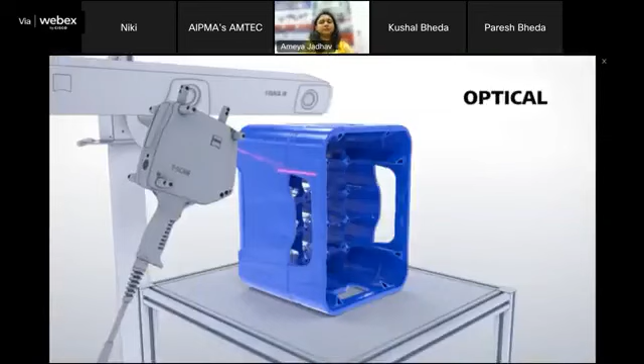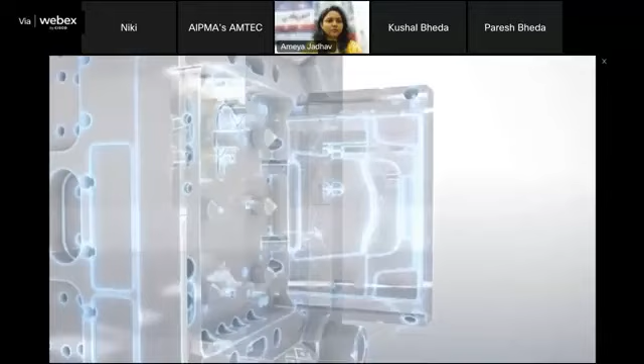With the help of Carl Zeiss, the center would offer programs and industrial services for reverse engineering. Zeiss products such as CMMs and 3D scanners would be used throughout the process chain. Targeted component and tool analysis of prototypes can be performed, as well as inline quality control inspections, ensuring an optimized production process. The training and services would lead to speed to market, reverse engineering scanning, design and prototyping, and increased efficiency, productivity, and cost of production.

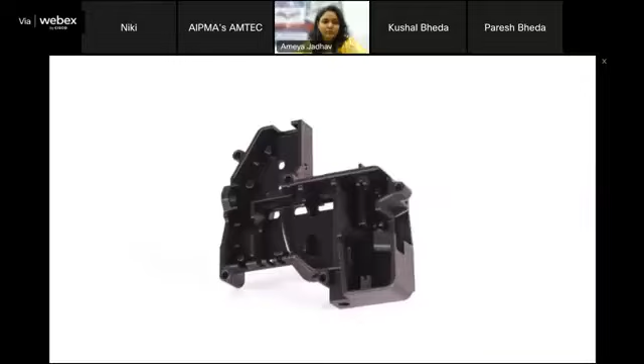AIPMA's AMTEC Center for Additive Manufacturing, with the help of leading international technology providers and our knowledge partners, is launching digital manufacturing. This is expected to lead to low-cost prototype development, low-volume production, and speed to market. Demand for skills in additive manufacturing is growing exponentially.

AIPMA's AMTEC SSA Center for Industrial Management would offer strategic management and marketing advisory services for startups, MSMEs, as well as corporates. A team of experts would support startup entrepreneurs and MSMEs with inputs to enhance their competitiveness for local and global markets. This center would extend benefit to help the industry in practical implementation of projects with increased profits.

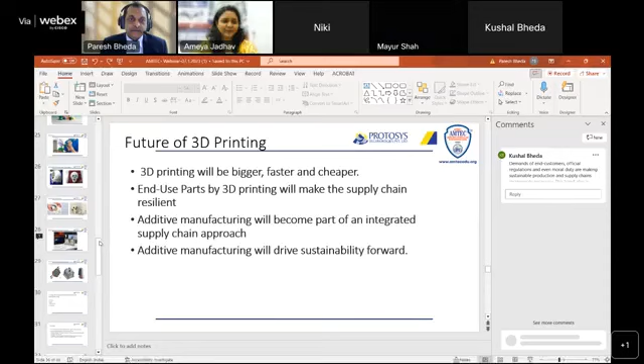Is the screen visible? Yes, sir. You can full screen it.

I'll take you through this journey of 26 years of 3D printing services in India.

Before moving to the Indian 3D printing industry, we need to know the creator of 3D printing. The first 3D printer was invented by Mr. Charles Hull, who is also called the father of 3D printing. He invented SLA technology way back in 1986, the first machine based on stereolithography technology.

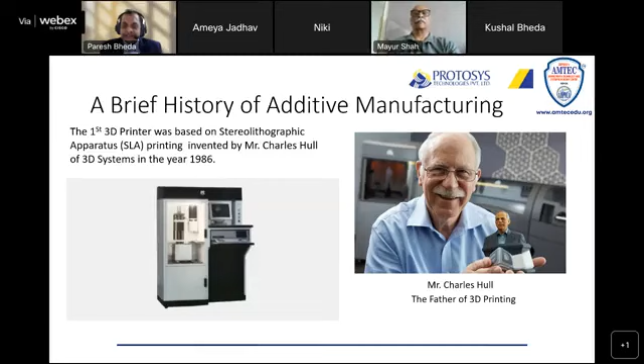Moving on to Indian history, FDM later on after 3D Systems, Stratasys was another company which came out with FDM technology in 1992. Protosys is proud to inform that Stratasys was the first company which Protosys joined hands with and brought in the first 3D printer in India for commercial services 26 years ago in 1996.

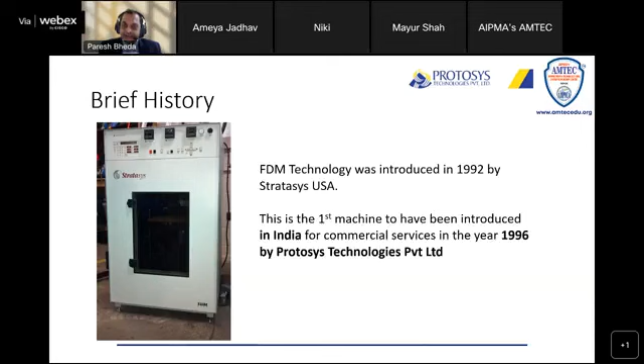So here on, I'll take you through the milestones of 3D printing in India. As I told you earlier, the first 3D printer for commercial services was imported in 1996. The SLA 3D printer came in around 98, 99 in an automotive company, followed by the SLS printer.

SLA printers were good for accuracy and surface finish with fine detailing. So the jewelry industry in India found fancy in that, and the initial machines were installed more into jewelry industry than our engineering industry, especially for SLA printers. The size of those machines initially were 250 by 250 by 250 cubes, so small machines, but fantastic feature definition.

Protosys came out with a 3D printing application in medical modeling long back in 99, 2000, wherein a CT scan data of a patient was taken and converted into a 3D model, which doctors used for study and planning of the surgery before operating on the patients. That helped them in reducing their operation time by almost 40%.

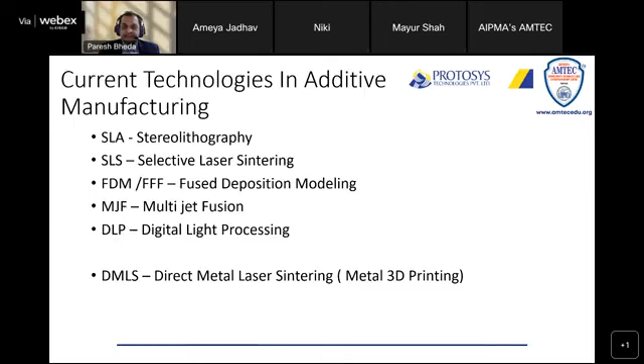I'll go through a few of the machine technologies in detail, explaining the principles on which they work. SLA technology works on laser-based technology, which converts a photopolymer liquid resin into a solid plastic by solidifying it using a laser beam.

One is opaque, which is ABS-based material, and another is transparent, which is an acrylic equivalent material. The advantage is very good finish - geometry detailing is too good, and extra smooth finish can be achieved.

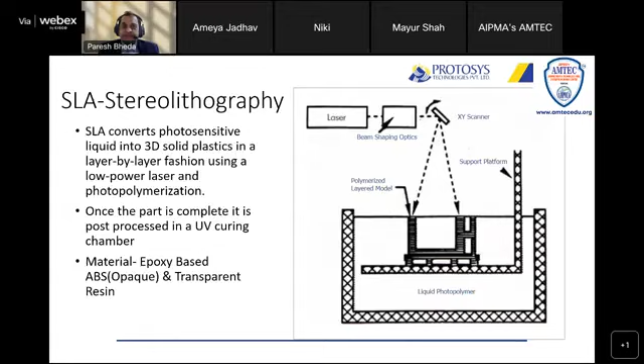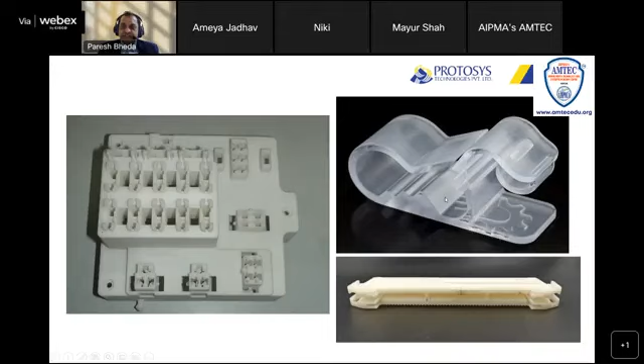Secondly, we have selective laser sintering process, which uses a CO2 laser to solidify a powder-based material that is coated layer by layer. Same as SLA, the bottom to top approach - the part gets built after layer by layer. The material comes in and the laser cures the area that is important to us.

The advantage of SLS is you get very good strength parts. The raw material used here is nylon and glass fill nylon, so at times you can use those materials directly for end use or easily used for functional trials.

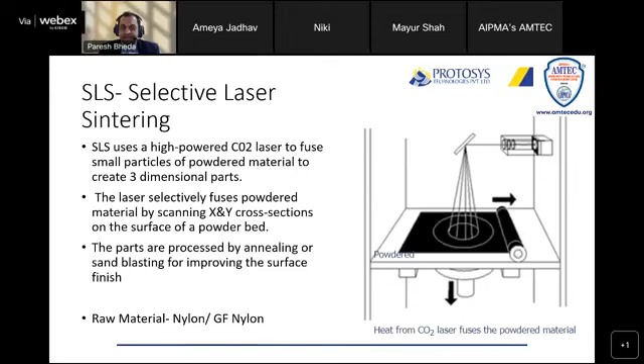The next is the widely used FDM technology, or fused deposition modeling. It uses a thermoplastic filament which gets heated in an extruder, and the plastic wire type of material comes out and is laid layer by layer to create a 3D model in a few hours.

FDM is the process which has many options of raw materials wherein you can use PLA, ABS, nylon, PC, and even high-end engineering plastics like Ultem and PEEK.

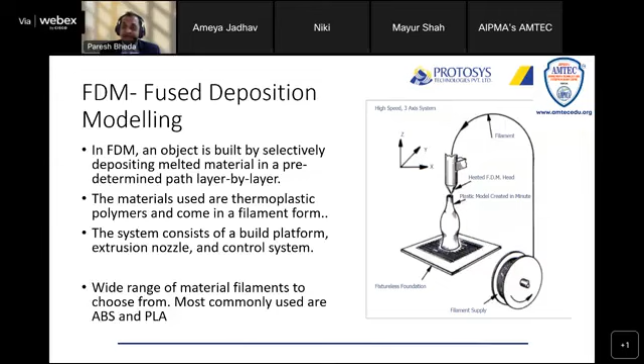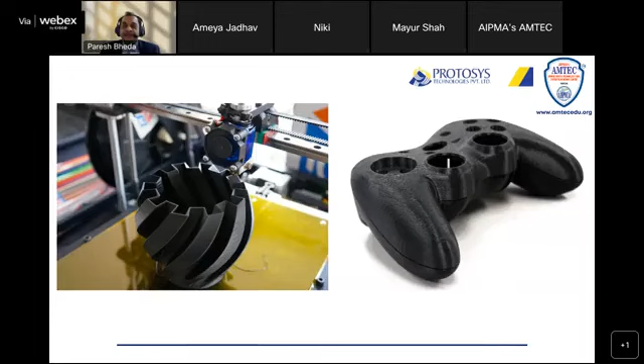The next technology we can talk about is MJF, multi-jet fusion, which has become popular in India in the last few years because of its strength and surface finish.

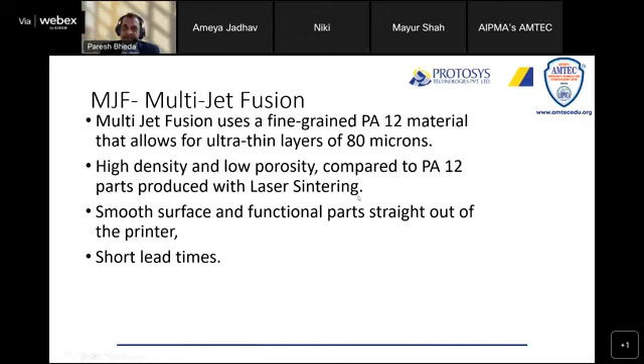The principle of MJF is that it uses again a powder similar to the SLS process, but instead of laser, here a fusing agent and a detailing agent are jetted through printer heads, and the part is formed layer by layer. Lamps are used to cure that, and the process continues layer after layer. You remove the powder and the part is ready to use.

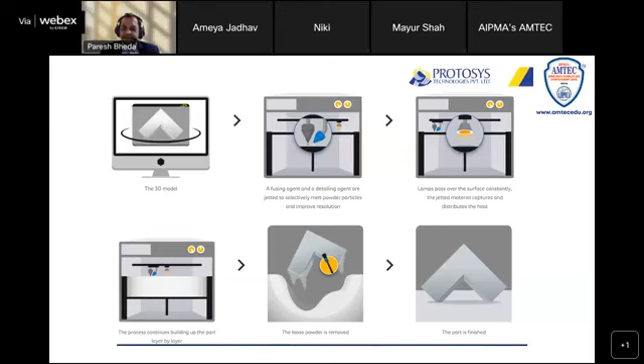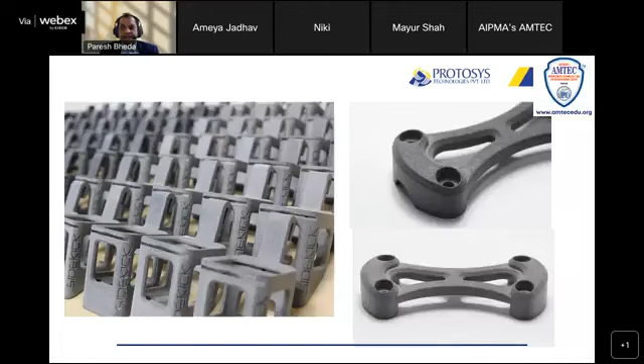The advantages, as I told, are the strength and finish. You can use it directly as end-use parts. You can see the samples here in the photographs - they have a beautiful finish compared to SLS, and good strength also. They have options of nylon and glass-filled nylon, two different materials available.

Next, we move on to DMLS, or direct metal laser sintering. Here the process or principle is the same as that of the SLS process. Instead of a polymer material, here we can use steel, aluminum, titanium, Inconel, different kinds of metal powders which are available in the market.

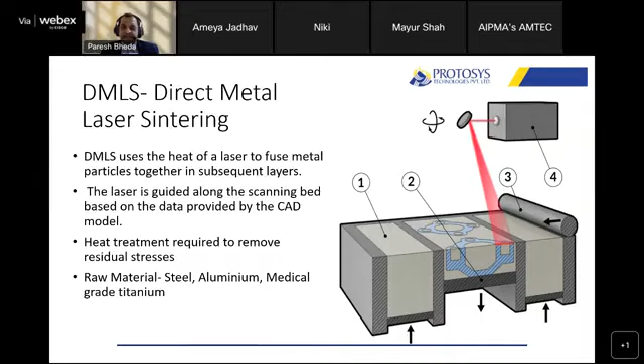The advantages are you can get end-use parts directly, wherein your short-run production parts are required. You can directly use them for direct use. DMLS parts currently are mostly used in aerospace, defense, tooling, and medical applications.

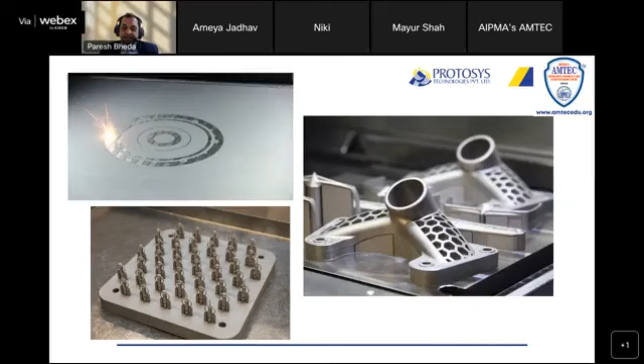Next, I would like to share some of the industry verticals where 3D printing is widely used. This is not the whole list - this is some of the list which I am sharing here.

We started in '96 with automotive, appliances, switchgear, and these companies way back in '96, and slowly graduated to aerospace, defense, toys, medicals, tooling, and in the new generation, drones, electronics, and PCB manufacturing.

We are seeing now 3D printing being used in construction. Customized medical implants have already started, and another major field which we are seeing in the future is tissue printing, where a patient can get his liver printed and transplanted into his body. Those days are not very far off - scientists and engineers in India and abroad are working on this.

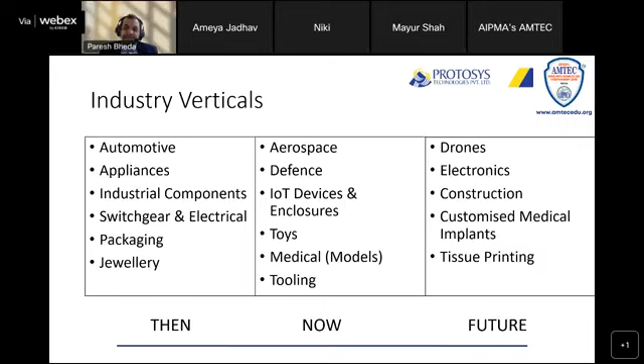So we will see lot many interesting things coming up in industry 3D printing applications in years to come. Now, I would explain a few of the industries where we are using some samples.

Automotive is the major consumer of the 3D printing industry, and almost 40% of the 3D printing industry is being supported by automotive companies. In India, all major automotive companies have captive machines like Tata Motors, Mahindra, Bajaj, TVS, Hero. They all have in-house machines and they equally offload jobs to service providers like us.

So for any automotive vehicle, whether it's a two-wheeler or a three-wheeler, you will find the prototype vehicle being built first using 3D printing technology, and only then the formal tooling and the final vehicle is launched into the market.

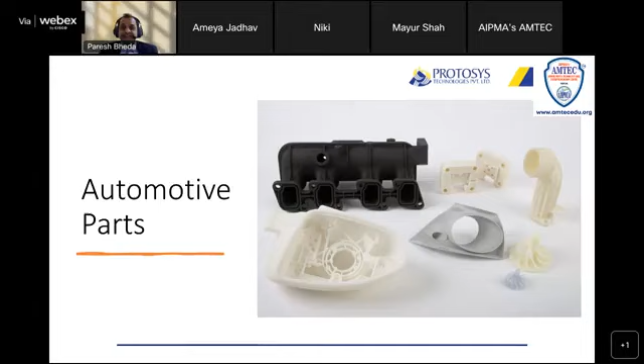For example, for a car, if you see all the interiors - the IP, the seats, the mirrors - in the exterior, you see different kinds of lights. Even the engine compartment has many parts which are 3D printed. So you cannot think today of a vehicle being launched without prototyping using 3D printing. It's just impossible. That's the impact of 3D printing on the automotive industry.

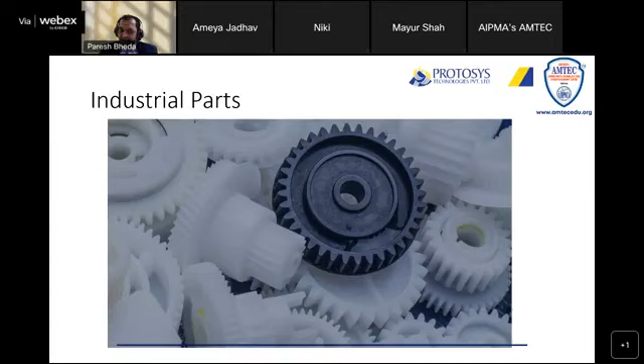Industrial parts - everywhere nowadays 3D printed parts are being used, either MJF parts, SLS parts, or through a secondary process of vacuum casting. You see many parts being used.

Electrical switchgear industry - you see every few months fancy switches coming into the markets. So without 3D printing, it's very difficult for manufacturers to launch different products in such a short time.

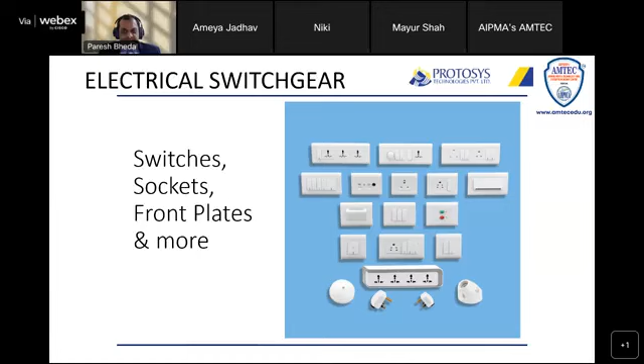Electrical appliances - lots of applications over there. It's for form, fit, functional trials, even for marketing, samples being given for test marketing based on the feedback coming from the consumer base, the modifications done, and then the final products coming into the market.

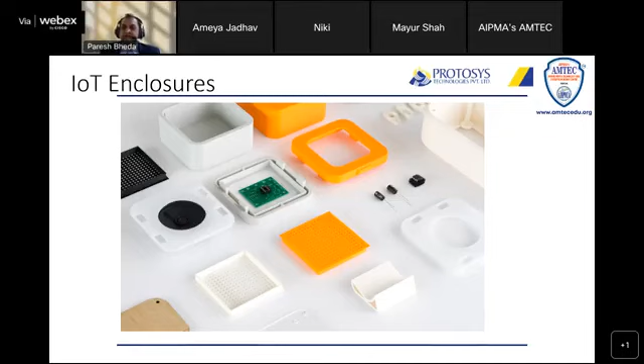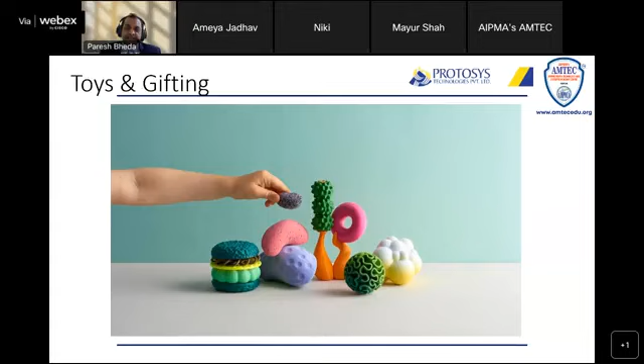Toys and gifting, you can think about different toys ready to use. In a few hours, you can design a toy, 3D print it, and it can be used. Lots of different ways of creating new toys are coming up due to help of 3D printing. People can think of different options of designing in different ways.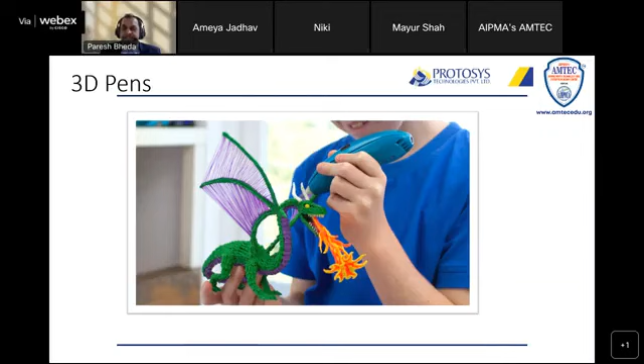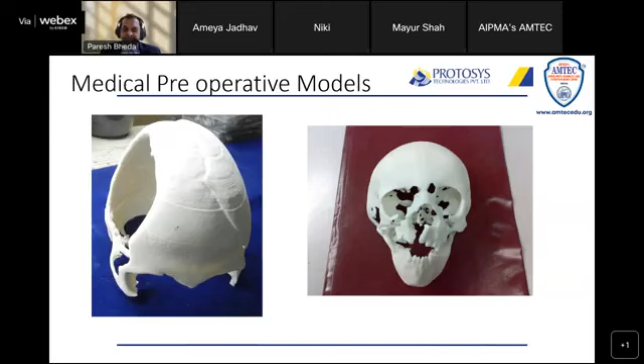The doctors can plan the whole surgery on this before they actually operate on the patient, and they can plan what type of implants are required, or even design the implants, which can be seen in the next slide. Here you can see a titanium implant designed using the 3D model. On the right, you can see a template created, and then this 3D printed stainless steel implant has been used in a patient, accurate and exact, as per the data received from a CT scan. This is a very big application of 3D printing in the medical field.

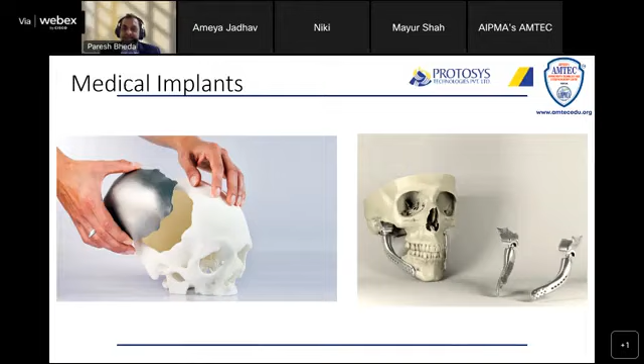You can see this core and cavity developed and fitted in a regular mold base, and then this is taken on a molding machine to produce maybe 20, 30, 40 samples in polypropylene or HDPE type raw materials. You cannot use very high temperature materials into these molds, as the life of this mold is less, being a plastic based core cavity. But definitely for initial concept proving, it can be very useful.

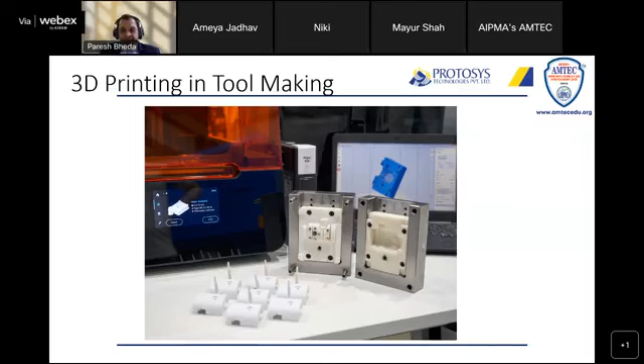It's any shape you can design for better cooling of a channel in a mold. You can design it, and it can be 3D printed through a metal sintering machine, and you can use that tooling insert into the mold. We can achieve anywhere between 15 to 30% cooling time reduction, with cycle times getting reduced by such a huge percentage, resulting in more productivity in injection molding.

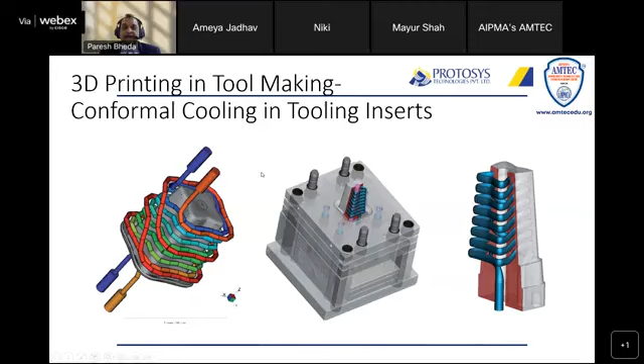This technology is picking up in a big way in India recently. More and more tool rooms are trying to adopt this technology, and we'll see, especially in the plastic industry, the benefits of conformal cooling having a long way to go, especially in injection molding.

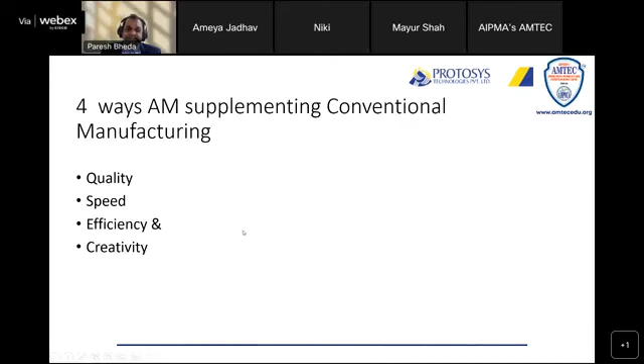Quality. Over the years, we have seen improvement in print quality. Machine reliability has increased for 3D printing since 1996, when we had only one machine with only 2 different materials. We could only print in ABS and wax. Today we have multiple material options available for different technologies, which have better surface finish, better dimensional qualities, and better usability. We have materials which can be directly used for end use.

DLP is a technology. Figure 4 from 3D Systems offers excellent feature definition parts, which can be directly used for end use purposes. You can create complex designs and shapes without any constraints of manufacturing for short run production. So in turn, we can have better quality products in the market.

There has been a lot of improvement in software, and we can see the improvement in surface finish of the parts, and even the time has been reduced, where the newer softwares can branch the parts in such a way that the productivity improves in a better manner.

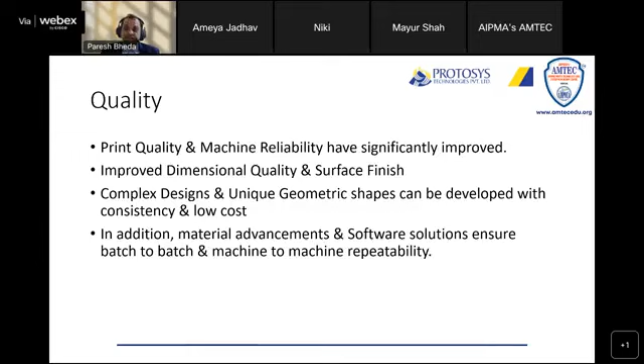Earlier, a new product used to take 6 months at least to see the market. Today, the products are launched within 30 or 45 days. And that could not have been possible if the designers designing their products didn't have samples in front of them in a very short period, which was possible only through 3D printing. You design a product, and within 24 or 48 hours, you have a sample in your hand.

You can assess that sample, make the corrections, get the second iteration done. So the final drawings which are released for tool making, you are sure that there are not going to be any corrections coming up. So 3D printing has helped a lot in getting new products into the market very fast.

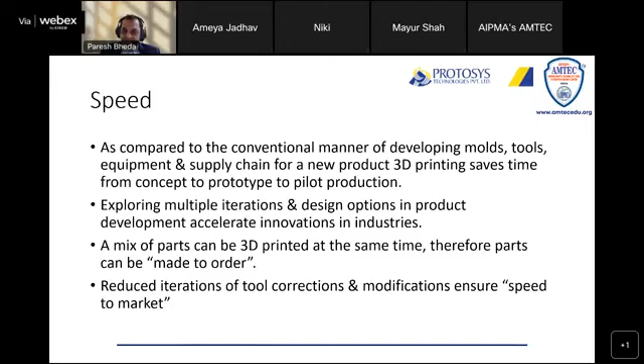Efficiency has drastically improved using 3D printing technology. Indirectly, if I give an example, a few years back, we had developed one prototype for an appliances company which was supposed to come out with a product that is a seasonal product.

But instead of going directly through tooling, they came to us for a prototype. Once the prototype was delivered to the customer, the marketing team just threw that sample saying the design was hopeless and it was not going to work in the market. Just imagine if they had come out with that product after making a tool, they would have lost that whole cycle of the product.

They saved that cycle of the product. They could immediately design a new product which got approved from the marketing team, developed that tool, and came into the market within time to save that product cycle season. So streamlining of the supply chain - if you look directly you might not see what help it can be doing, but indirectly, the supply chain management has been much more affected by 3D printing.

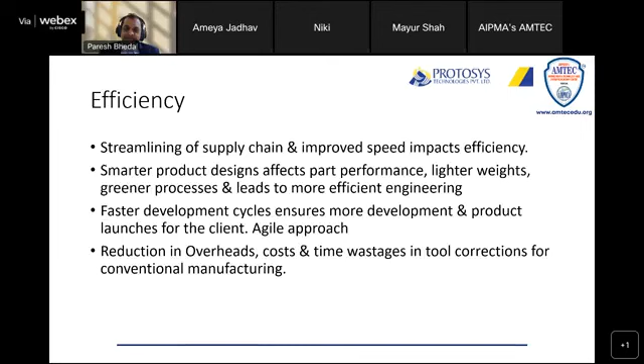Creativity, another aspect. You can innovate designs for a short run production. Say I want to give some out-of-the-box gift to someone which is not easily available in the market - I can design that and directly 3D print it, and it can be given to the end user. So creativity is at its best when you have the support of 3D printing.

Many new materials, as I mentioned, are coming in. A few more - the development is still happening.

Another application is collaboration between teams. One team is sitting in Germany, second team is sitting in India, and if you want to develop a product, just through drawings and discussing on the drawings is not going to help. In a way, if both teams have samples, they can go through the nitty-gritties of every detail and come out with a product which is highly effective.

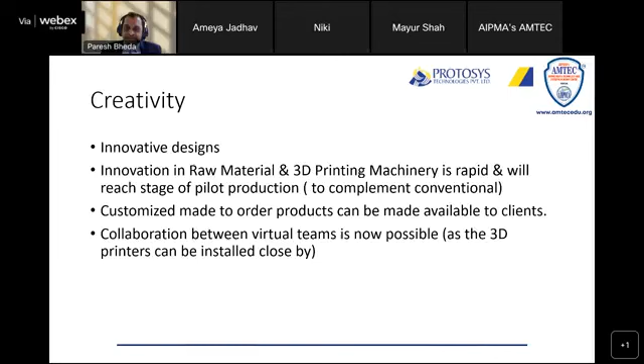So, saying all that, there are still some challenges in 3D printing over the years. These challenges existed during those days, and even now we have those challenges.

Cost, the pre and post processing costs were there during those days, and even now we have those challenges. Raw material cost, I will tell you, we were using ABS spool in 1996 at 22,000 rupees a kg. It was a bomb. Today, if we tell someone that 22,000 rupees a kg was the raw material cost, they would laugh at us, because now the ABS spool we use is around 800 to 1,000 rupees a kg. Still costly, but compared to that, it is nothing.

Cost of 3D machines in those days was a bomb. It was very costly, very limited machines available. Technology limitations, as I told, finish was not up to the mark. We used to have to do proper finishing.

Customer awareness, I would like to give you an example. We had participated in an exhibition at Goregaon around 96 or 97, I'm not very sure the exact year. We had displayed some samples. A customer came to our stall, we showed him a sample and told him, see this sample, it is made without making a mold. He just replied back saying, 'Are you lying? It cannot be possible that a plastic product can be developed without making a mold.' So that was the awareness during those days.

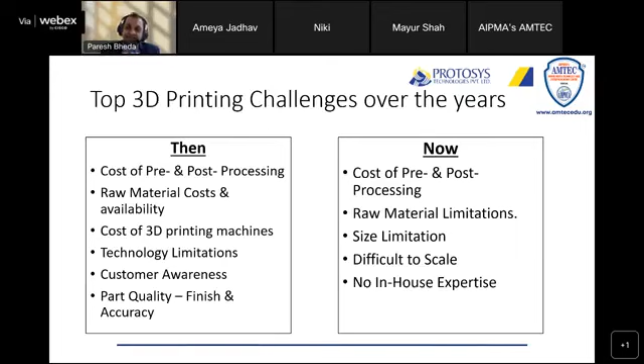Future of 3D printing. We spoke about the past, the present, now the future. 3D printers are getting bigger, faster, and cheaper. The cost of the first Stratasys machine we had bought compared to today's 3D printers available at very, very low prices. Even SLA printers have come down a lot at similar sizes. What we could get as a 250 cube machine, today we can get a 600 by 600 machine at maybe that price or lesser. Chinese machines have come down, they have brought down the prices.

End use parts, as I told, will definitely impact the supply chain when we can give actual end use parts directly through 3D printing. Say your product line is stopped due to something, you need some parts immediately, and for that you can immediately print some parts and provide it so that the down the line cycle doesn't stop.

Every technology has its own USPs. Some have better quality, some have better strength, some have cheaper options. So we do not have any one technology which can cover everything. We'll have to live with that. In future, we may expect something different.

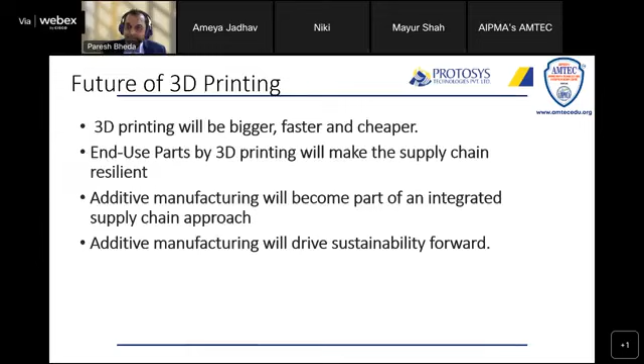We are seeing such technologies being developed, like in the K exhibition in Germany. Arburg had displayed one machine wherein you just bring any type of pellets, whether PP, PC, or nylon. You just put in the pellets, it extrudes, and you get a part in any kind of material. We are looking forward to that technology. I think if that becomes popular, it will change the whole way the world looks towards 3D printing, because then there will be no limitation of material, you put in any material and it will print it.

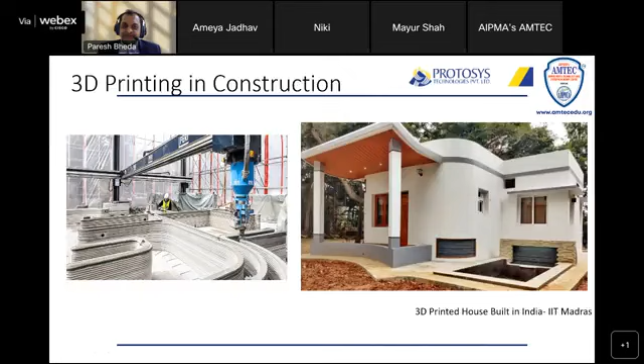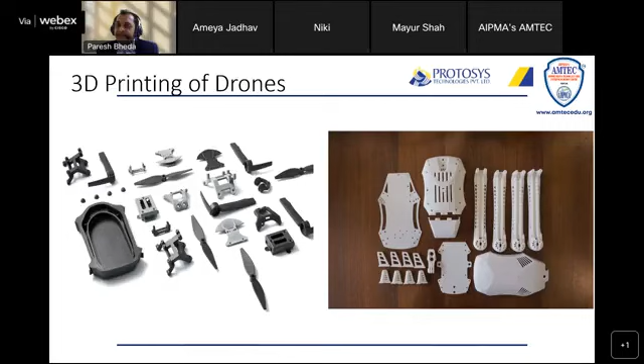Drones, as I told you, with newer materials like carbon filled and fiber filled materials, some machines offer these materials to be built. This has reduced the weight of the parts and increased the strength. A drone is a very good example of this, where part weight is reduced and strength is increased. We'll be seeing these technologies and machines used more and more in future. Other than drones, maybe tooling fixtures, where it will replace aluminum or metal fixtures, and we will be using such lightweight fixtures instead.

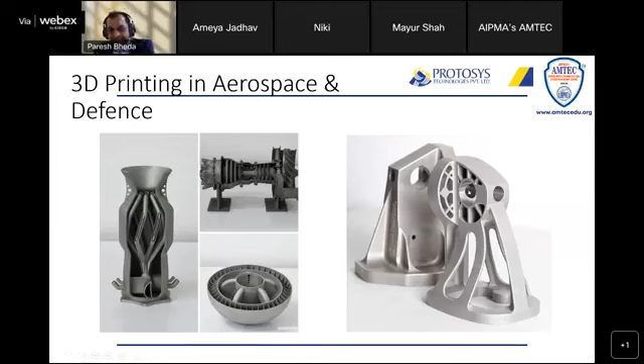On the right hand side, there are two samples. One is manufactured in a conventional way, it is a solid part. The other is manufactured using 3D printing, it's a lightweight part with lots of air pockets created in it. It has better strength than the solid one and is a lighter part. Today we are looking at vehicles or aeroplanes, and the main idea is being light, light, and light. So 3D printing is definitely going to help in getting those weight reductions.

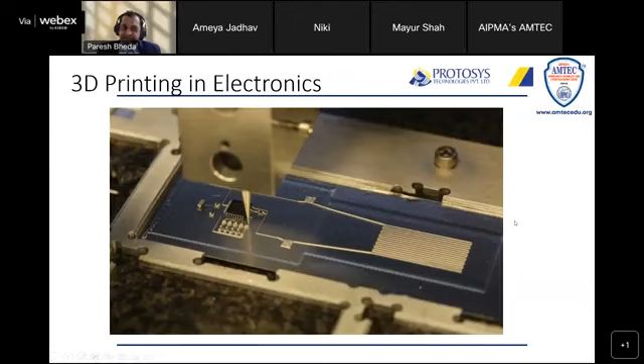3D printing in electronics. This is another fantastic area in future. You can print any PCB in a matter of hours. Any shape, size, design can be 3D printed. Don't depend on others or mass manufacturing. If you are trying to develop something, you have designed some electronics, just print it, use it, revise it, go on iterations. So we are looking forward to seeing it grow in a big way in electronics.

Now we come to the scope of 3D printing in India. Over the years, we have been seeing that 3D printing still has not picked up in a big way in India. If you compare to China or other developing countries, we are still way behind.

But with the Make in India campaign started by our government, in the last couple of years we are seeing toy parks coming up in various parts of India. R&D in defense, the government is promoting Make in India in defense, where our defense budget is so high, if we can cater to that, I think it is going to be a very big game changer for the Indian 3D printing industry if we can cater to two big industries, military or defense and the toy industry.

The toy industry is booming like anything, and it's unbelievable. Today there is a company in Bangalore which caters to 8 international brands. They have 350 injection molding machines in-house with zero sales in India. They only support international brands like Mattel and Hasbro and all those brands. So you can just think about what can be done in India, and 3D printing is definitely going to help in that.

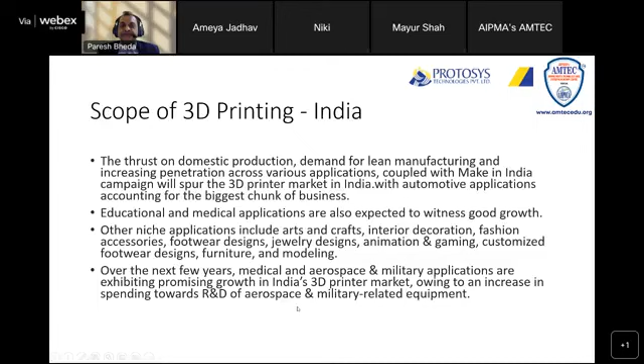I'll take you to our AIPMA's AMTEC, what we are doing, and how we are trying to help the Make in India initiative. So I'll take you through this.

AMTEC, called Arvind Mehta Technology and Entrepreneurship Center, is being promoted by the All India Plastic Manufacturer Association. The setup is in Andheri MIDC. All are welcome to see it over there, come and have a look at the setup. It is an approved training center by Skill India, NSDC. I'll share the list of training courses that happen over there.

3D printing is one of the courses happening over there. We have reverse engineering, then training of NX through Siemens - those training courses are going on. We have special prices for students and industry personnel who want to upgrade or upskill themselves. 3D printing courses are there. It's a 70-hour course for just 15,000, and this will definitely help the gap that the 3D printing industry is looking at. Jewelry - we have special courses for jewelry too.

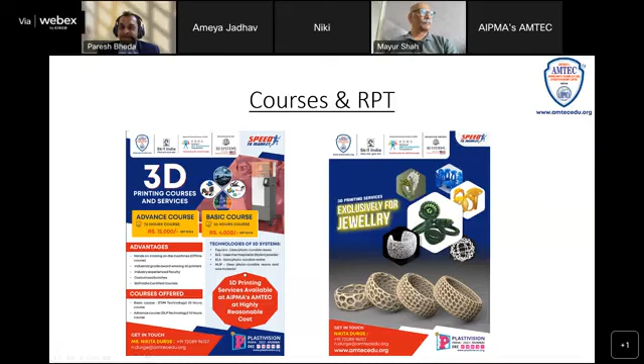Thank you very much for listening to me, and now I am open for questions.

Hi sir, so I do have some questions over here. Let's just make it quick because our session should be getting over by 4:30. So let's just make it quick, okay?

Mr. Pankaj had asked which PP material is used in 3D printing - it's PPHP/PPCP. See, right now PP is only used, but processing polypropylene is a very difficult task, so very few people are using PP on FDM machines. As I told you in the example, it was mainly PC, ABS, PLA. But yes, PP is being used, though it is not PPCP, it is normal PP.